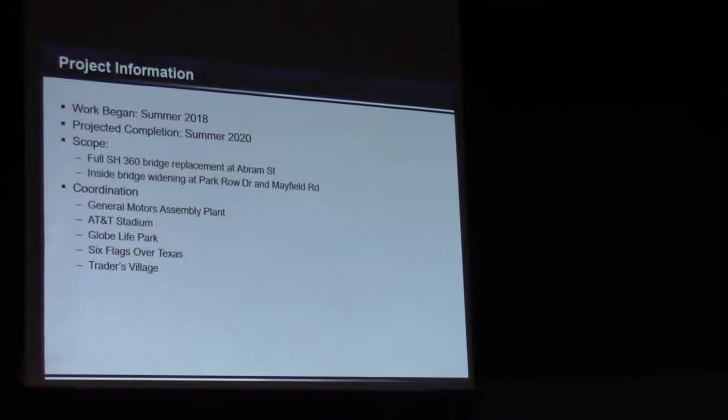Now, there are 3 bridges that we have to work on, because 360 goes over some roads and under some roads. Like 303, it goes under. But at Mayfield, at Park Row, and at Abram, 360 crosses the roadway. So we're rebuilding Abram Bridge completely. We are adding to the interior at Park Row and Mayfield.

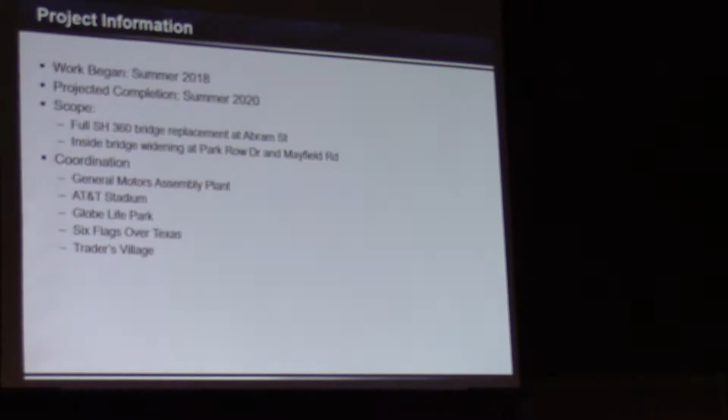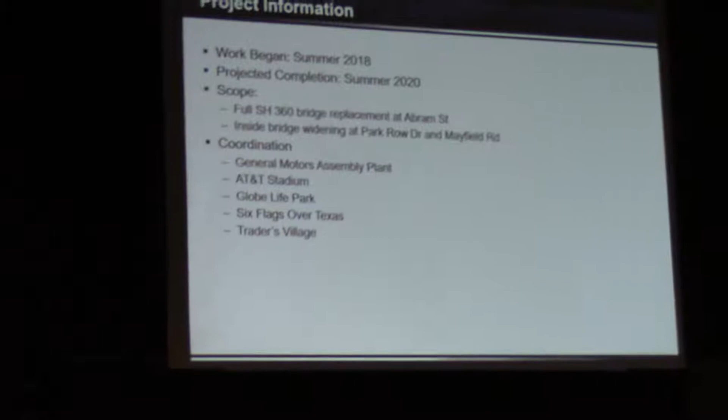And the contractor has split the long project up, so that basically Mayfield to the south is the first part of the inside widening. Abram Street Bridge is a full 2-year project. So they've started on it, they'll continue working on it. It's scheduled to be finished next summer, not this summer, but next.

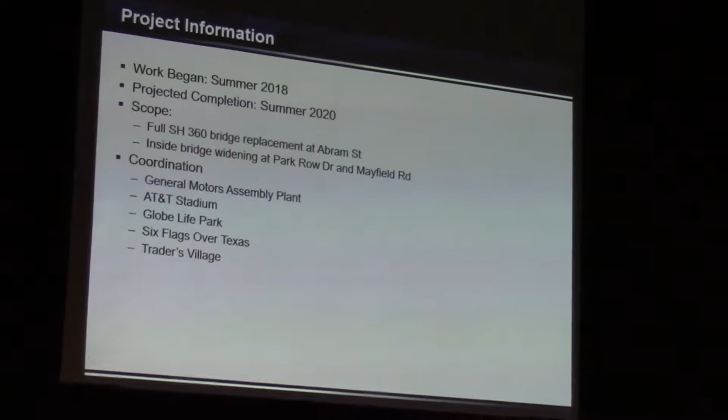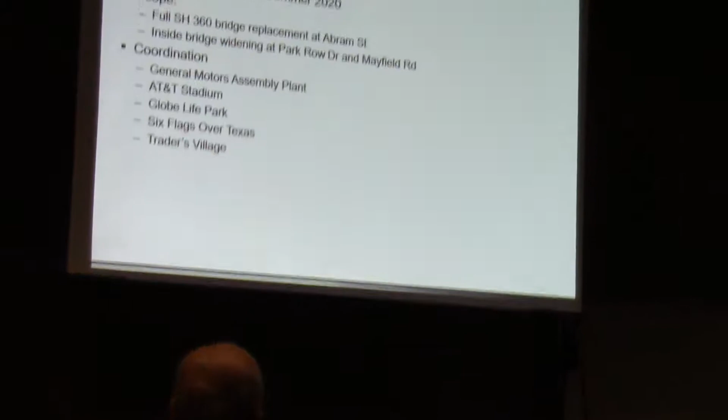And as they finish the south widening, they will open that up, and then they'll work from Mayfield up toward Abram on the inside widening there. So it's a way for the contractor to get some things done, open it up to the public. But the whole time they're working on it.

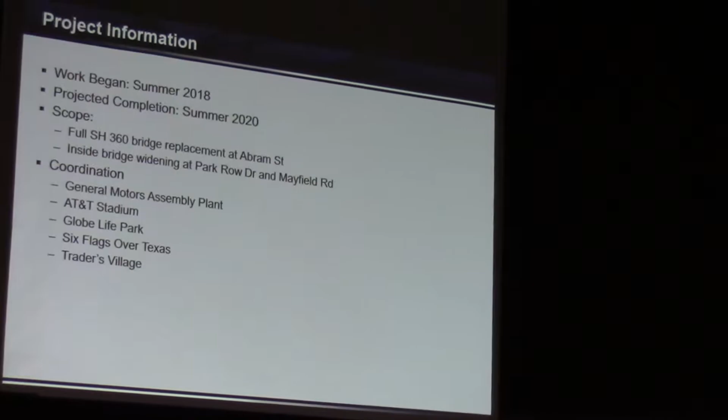360 - well, it's like someone asked me, will 35 never be under construction? And I said, it's a long road. It's going to be under construction somewhere sometime. And 360 is like that - yeah, they're always doing something. This past summer, if you've driven 360, they had a big summer all summer long about from Lamar Boulevard to the north up towards Trinity Rail Express, where they kind of ground the concrete down, made a smoother ride. It's got a little bit more friction, so it's safer. So there's always something happening on the roadways.

Is that 360 now a toll road? From Camp Wisdom to the south is a toll road. From Camp Wisdom to the north, it's not toll. Up to the airport? Yes, sir, up to the airport. And from Camp Wisdom to the south, NTTA operates it, and TxDOT provides the maintenance. So it's a way for TxDOT to do some things where it's kind of taking some of their system off, but that's the agreement that they have.

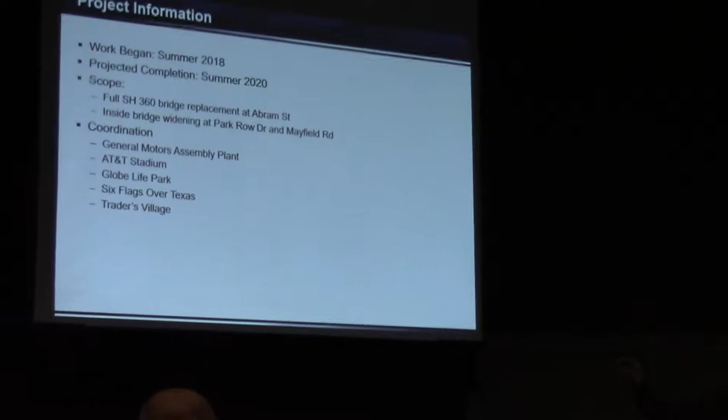Here, we're still coordinating with the venues, but we're also coordinating with the General Motors assembly plant, which is right next to us at Abram Street. So they have a lot of employees that live in South Arlington that come up 360 and have to go through our lane closures. And they also have suppliers with their just-in-time delivery to the assembly plant. So we try to keep them informed as much as possible about what we're doing, so that way they can adjust to certain lane closures that we have and the delays that those cause.

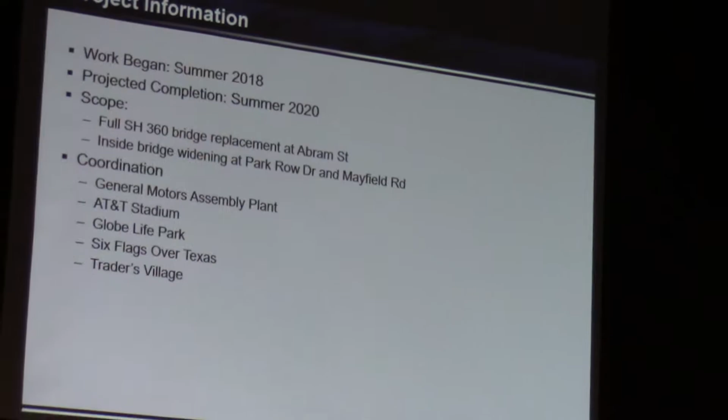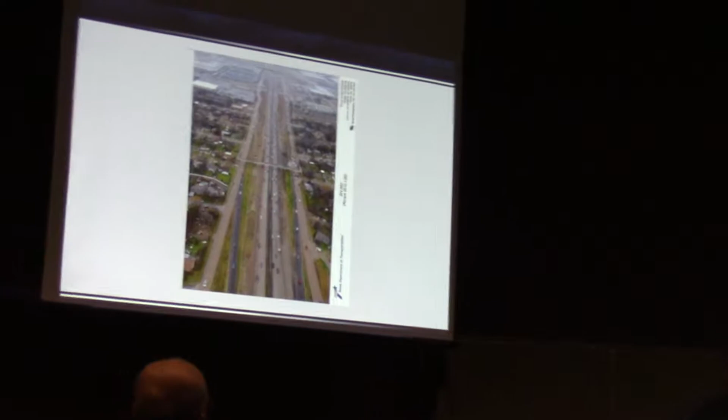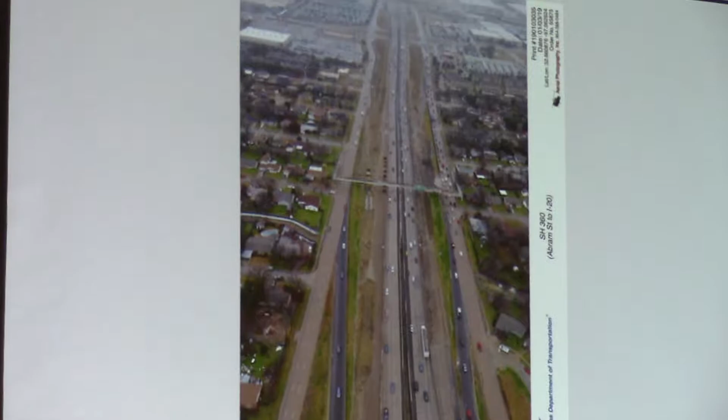What was interesting is when we were placing beams over the roadway, we tried to coordinate with UP because in order to detour traffic, we didn't have a frontage road. So you had to go to Great Southwest Parkway if you were going north, and you had to go to Stadium if you were going south. And we would tell them, hey, we're going to have this closure all weekend long to tear down a bridge or to put beams up on a bridge. And invariably, UP parked a train over Great Southwest, because they're switching. And so we had to go to the next street.

We had that in our plan, so that whenever it was blocked, our Arlington police who were there, off-duty officers, they were to cone off the left turn lane so you couldn't get in and get frustrated, and send people to the next crossing where there was an additional detour sign. But that was a challenging project.

So this is looking north. General Motors is right here. So this is Abram right here. There's Division that we're talking about with the railroad, the pedestrian bridge. So a lot of the work is right in here, that southbound entrance and northbound exit - we had to close those down because we're widening to the outside first.

We pushed all the traffic in, squeezed it in the center, and then now we're building the outsides. After we get the outsides built, we'll move traffic out, and we'll tear down the bridges in the center, and then build the center up.

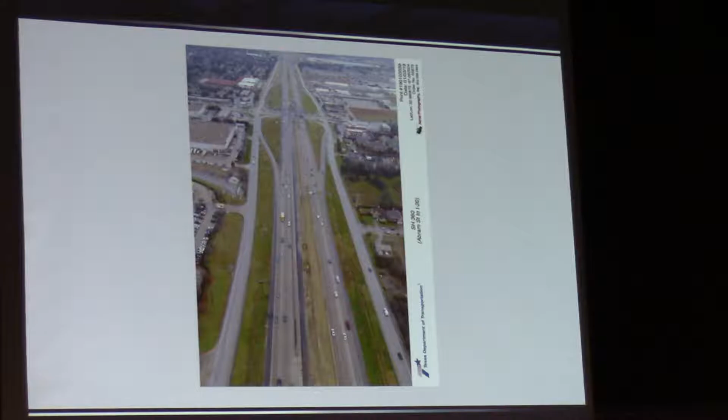So here's looking at Park Row and then up north. Nothing really exciting in these pictures because nothing's happening - it's in the later phase. Here is 303. And here is just south of I-20. You can see here, this asphalt thin layer and this dirt, that's the inside widening that we're doing. So they're putting asphalt down and they'll put concrete pavement on top.

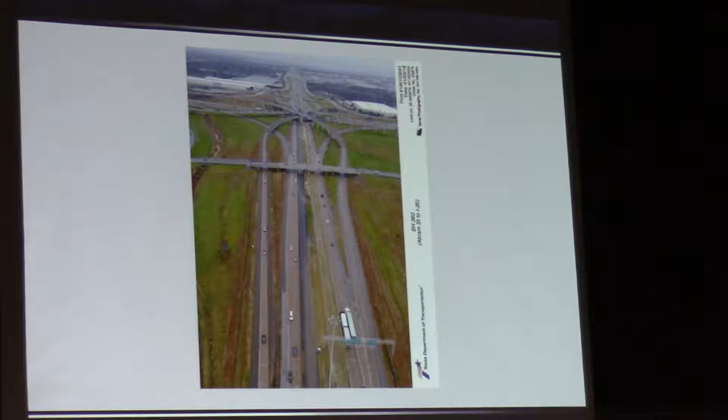And that's really that project. It's pretty simple. Any questions about the 360 widening? How much money is that?

Oh, I had that on the slide. I've got so many numbers, I thought I did. I'm drawing a blank as to what the cost is, but I know it's on the website. So keep track of 360. If you go to information, frequently asked questions, the cost is there.

That widening goes all the way to Camp Wisdom. It goes to Kingswood Boulevard, the major street just south of I-20.

All right, so there's that. The 820 East Loop project, where there are more questions on 360 widening. Okay, 820 East Loop project.

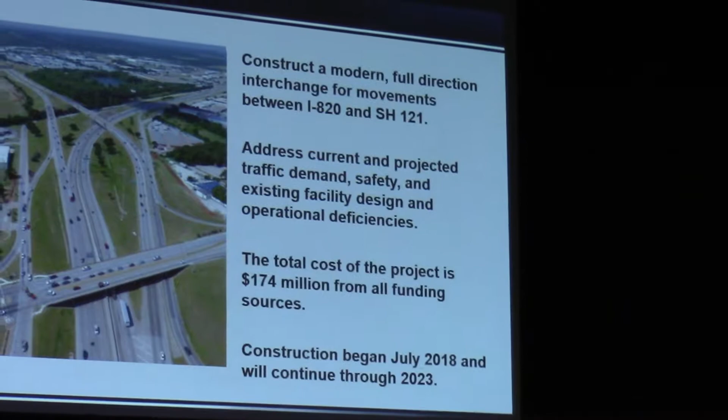Again, this is a project where we are building direct connector ramps between 820 and 121, so you don't have to get off of the highway and do those strange movements to go highway to highway. That's what we're building. I'll let you know we are building what's called an interim phase, not the ultimate phase. I've got a visualization that will show you the ultimate phase, which has the express lanes in there. But what we are building does not include express lanes. What we're building are the direct connectors, the main lanes for non-toll traffic, and rebuilding frontage roads, things like that.

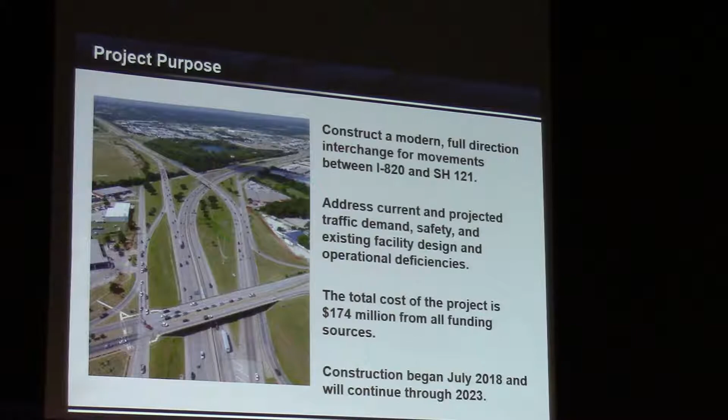This project is $174 million, and it's scheduled to be under construction through 2023. So I keep getting these jobs. At one point, TxDOT, I'm going to have to retire from doing this.

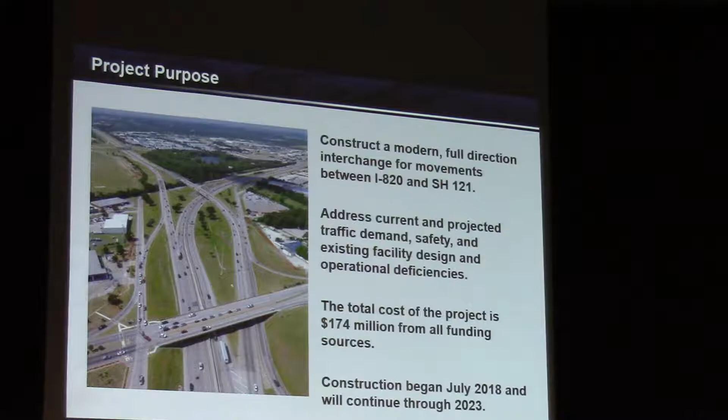When's it going to be widened from north from I-30 to all that? Look at that right there. Thanks for the segue, I appreciate that. Yeah, that's long overdue.

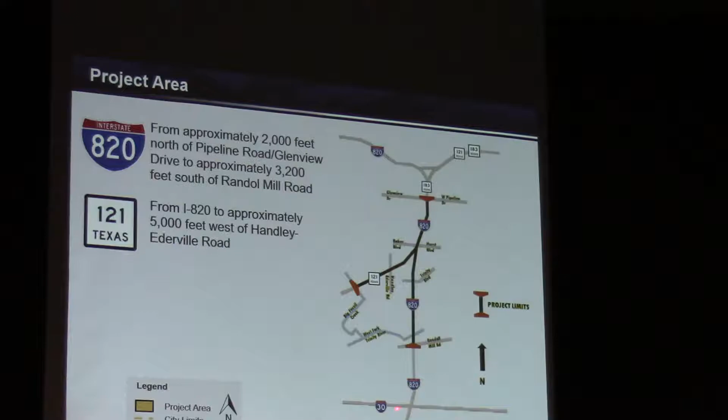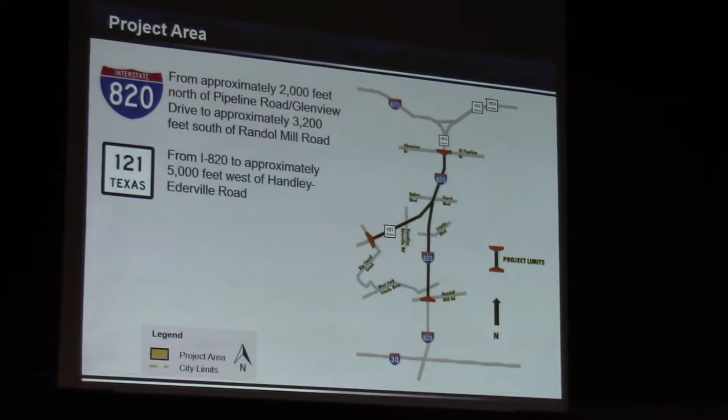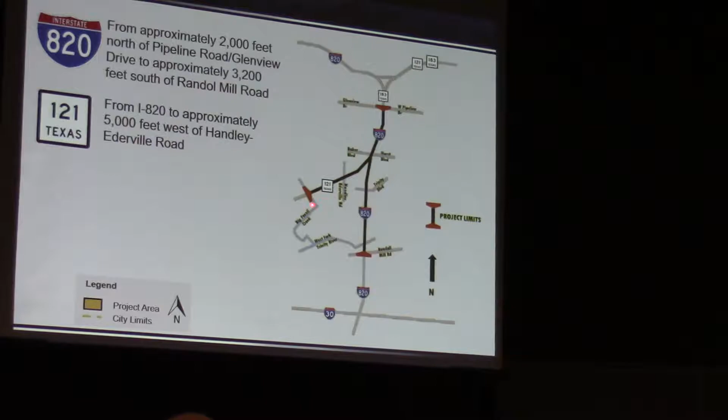So what we're doing is, it's not directly at I-30, but at Randol Mill with the Trinity crossing. Really it's the crossing of the Trinity, and then the next crossing is Mosier Lake, which is kind of an overflow for the Trinity. That goes all the way up to Glenview Pipeline. We're not doing anything in the interchange. And then we come down 121 to Big Fossil Creek, just on the west side of Richland Hills.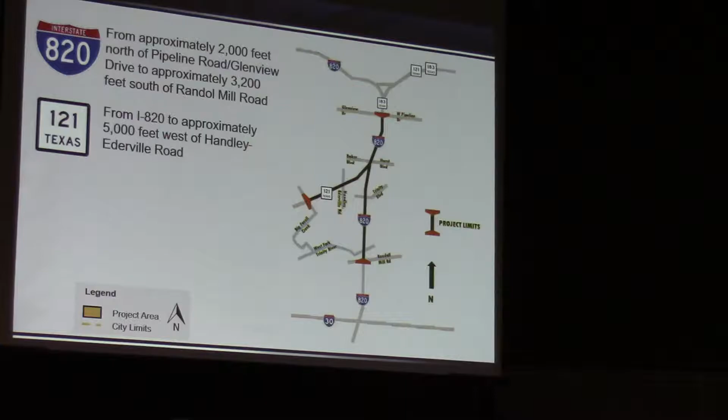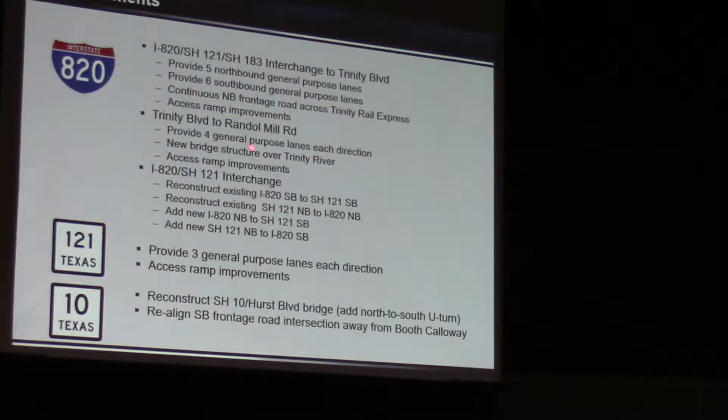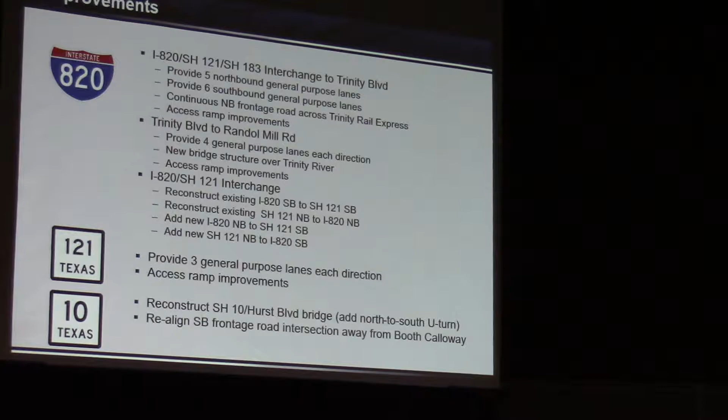So those are the project limits, and these are all the things we're doing in the interchange on 820. Really the biggest thing here is the interchange itself. We're doing some work at Trinity Boulevard, Randol Mill, on 820, providing 4 general purpose lanes, which is 4 in each direction, a new bridge over the Trinity, better ramps, things like that.

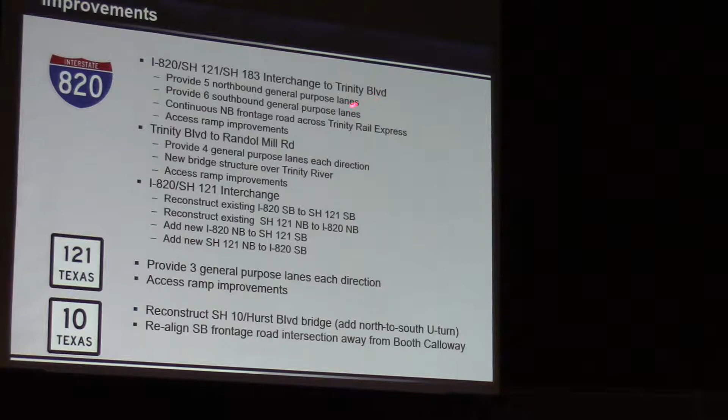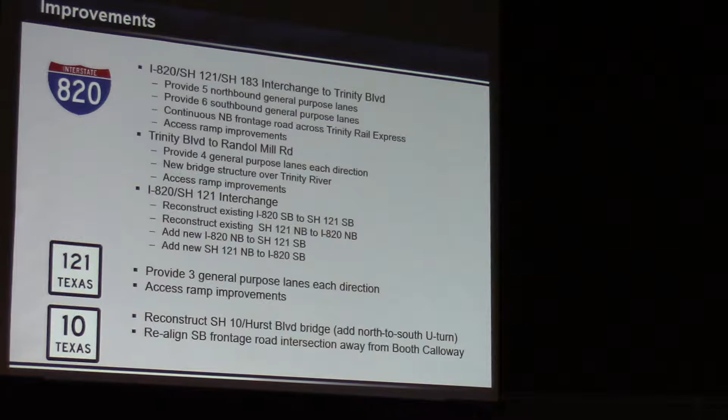From Trinity up to 820/183, we'll have 5 northbound lanes, 6 southbound lanes, continuous frontage road crossing over the Trinity Rail Express, connecting Trinity Boulevard to Hurst up north, and ramp improvements. And then we're reconstructing Highway 10 as it crosses 820.

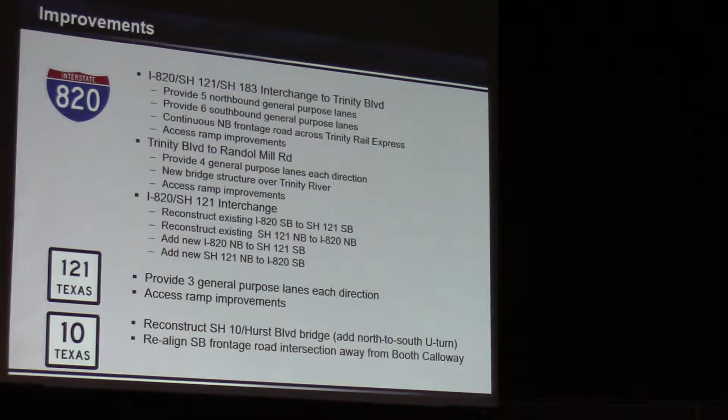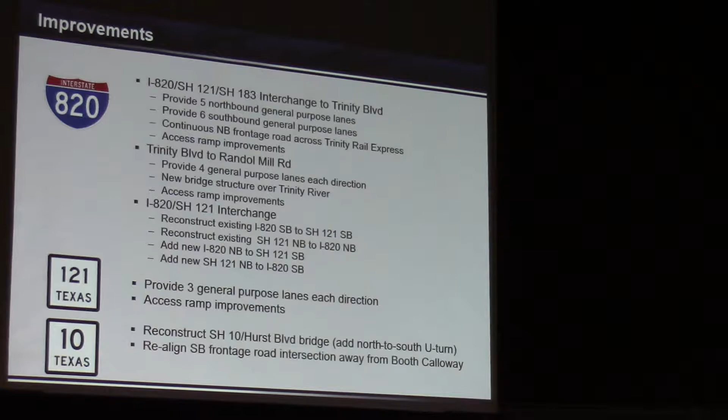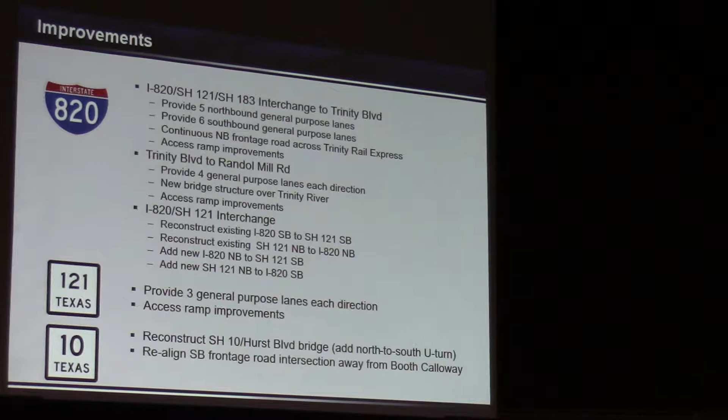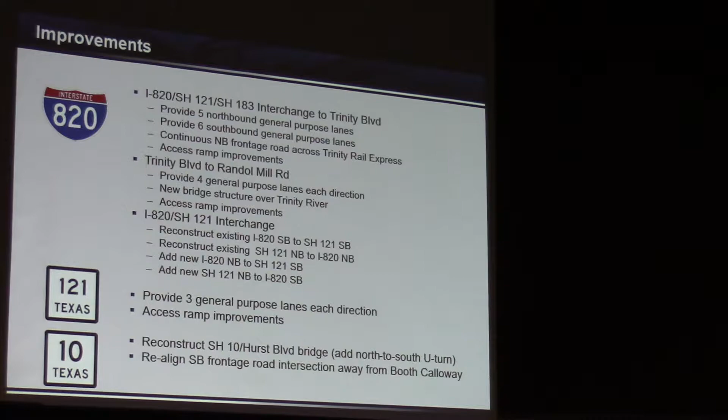Yes sir. Okay, that intersection on 20 and 820, I got broadsided as traffic was coming off Bowman Road. Bowman Springs. Oh, Bowman Springs. Yeah, she didn't realize her lane ran out, and she hit the side of me. And then he said, she said, so I paid for that. But that's not what you're talking about, that's further south. That's going to be the last project I talked about. I've heard of a lot of accidents in that area.

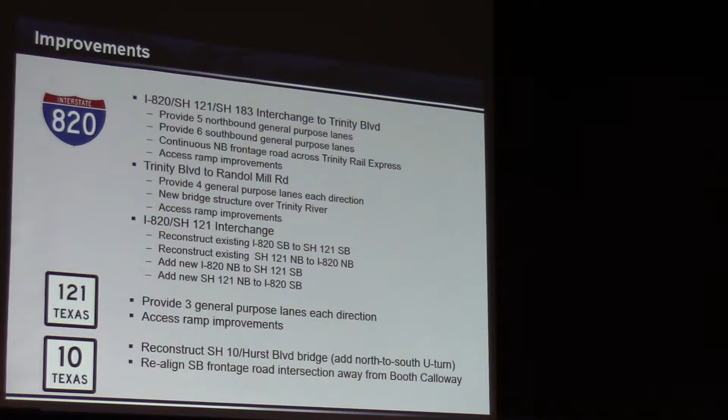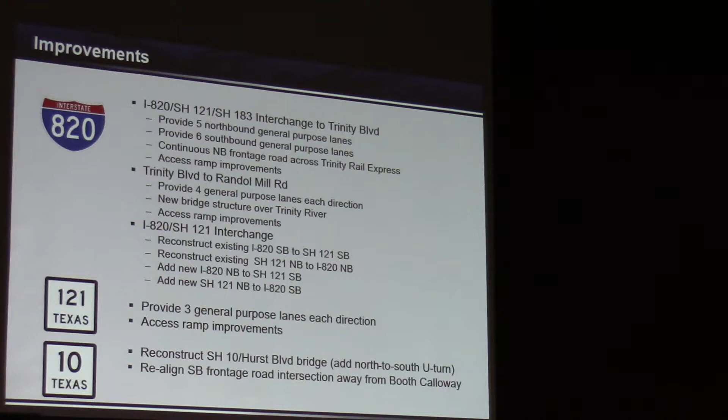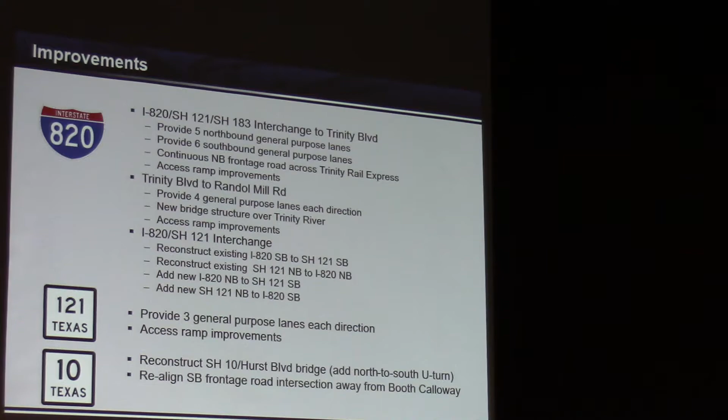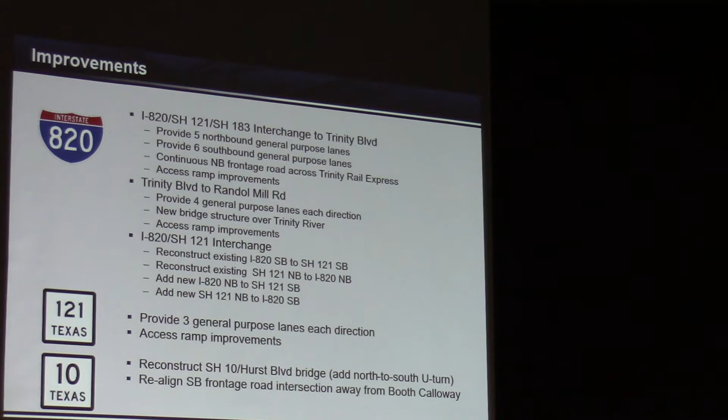Yeah, there are. Again, it's good when you're driving to do all the things you were taught in school about signaling, looking over your shoulder. I tell my kids that all the time because I catch them not doing it. It's easy to get out of the habit, but it's safer when you do that. Well, the only thing is I don't remember any sign indicating that lane ended. There's probably a sign, I bet there's a high probability there's a sign, but a lot of times people just don't see the signs. I get a lot of requests to put more signs up, and people aren't reading the signs that are there. I've got 3 or 4 signs telling you something and you just never saw them. In Spanish? No sir, no sir.

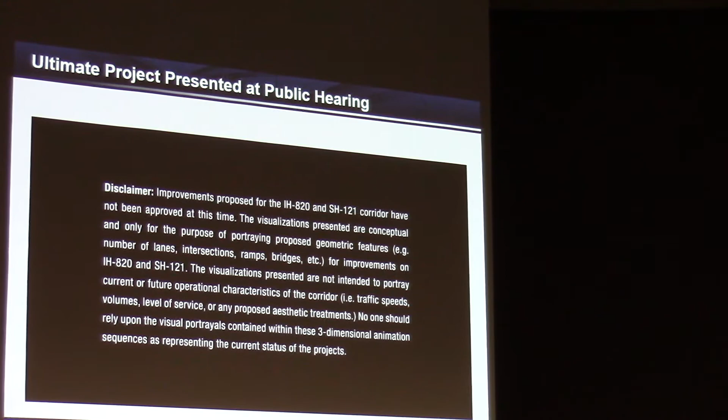So this is going to be a visualization. Again, this is the ultimate project, which includes everything, when TxDOT has enough money to do all the work. But you'll see the direct connections from 121 to 820, as well as the frontage roads, things like that in this visualization.

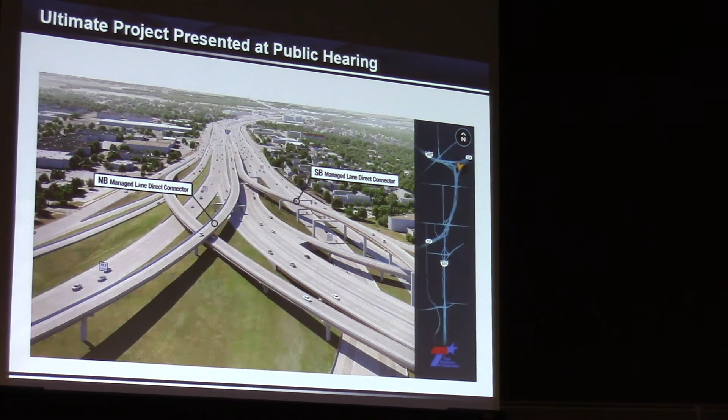How far along are we at this point? Very, very early. Construction just started this past summer. Okay, good, I thought so.